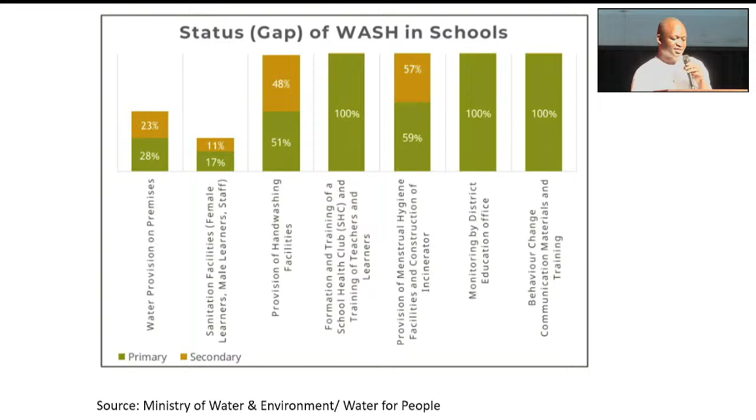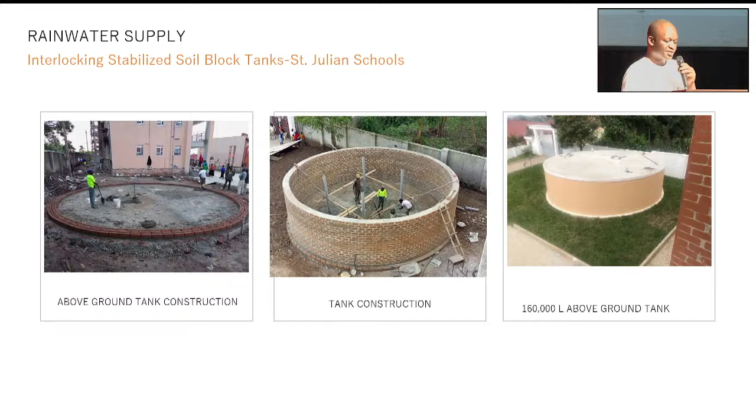We'll look at aspects of water supply and treatment, starting with rainwater supply. My colleague Alan will get into more detail on this, but one of the technologies we're using in terms of storage are tanks made out of interlocking stabilized soil blocks.

Here we are doing a double wall. This is an above ground tank, with a capacity of 160,000 liters. We have done tanks underground with a capacity of up to 450,000 liters using the same technique.

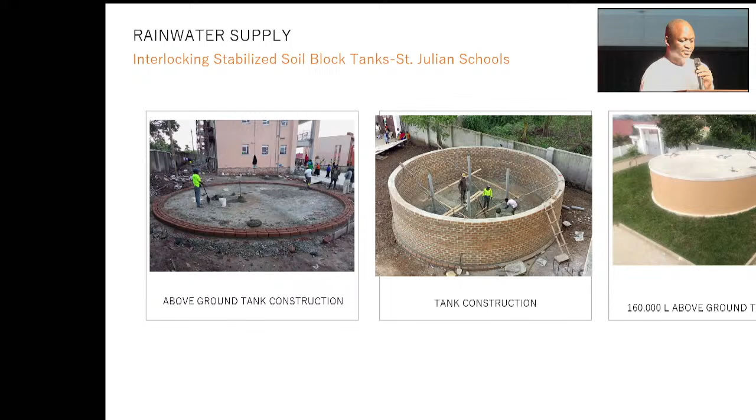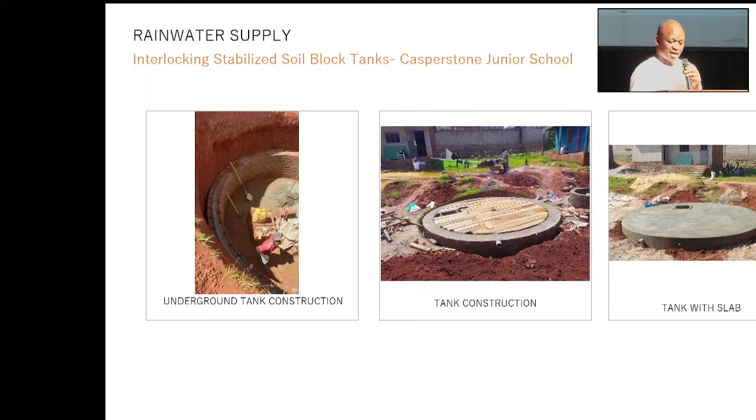This is an underground tank water supply at a school on Entebbe Road called Casperstone Junior School. It's underground, and the school is a small school for around 100 people, so this was a 40,000 liter tank. As you can see, it has a slab.

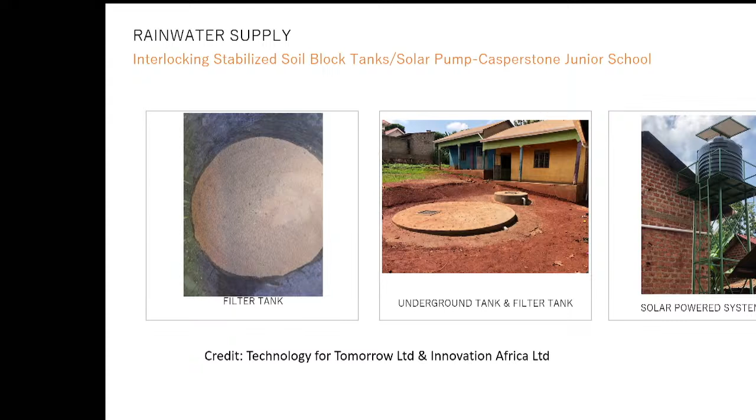The other element it has is a small filter tank that works on the principle of the biosand filter. So there's some aggregate, some sand, and larger aggregate, so it filters through—that's what you're seeing in the middle picture, the smaller tank. Then we are able to supply the school water to the elevation tank, which distributes to the school, including a membrane filter so that we can actually access clean drinking water.

These are also other options for groundwater supply. I think one of the headaches for institutions, particularly health facilities and schools, is even when they do have pipe water supply, they cannot afford it. For those in Uganda, it's almost a proverb to hear of a health facility whose bills have run so high.

So these alternative sources—I know a lot of private schools in the country use alternative sources, including groundwater. This one is for groundwater, which is pumped to an elevation tank, and you have a tap stand there, and they're also able to have a pour flush latrine to ensure hygienic sanitation.

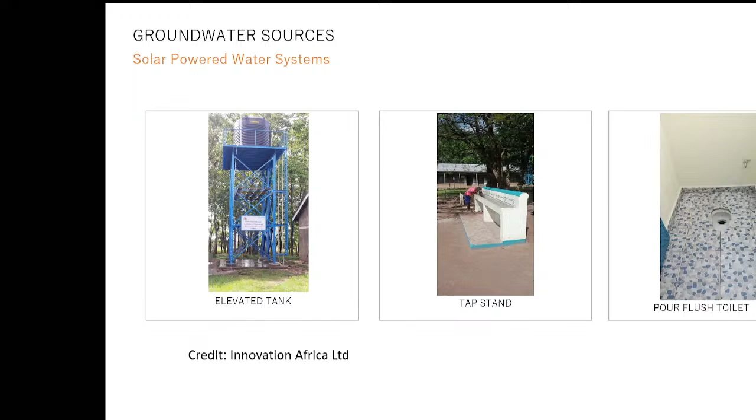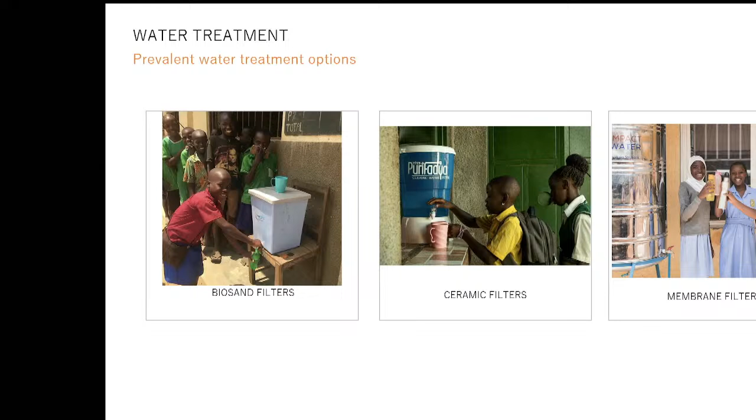There are a number of options for water treatment: point of use, like the biosand filters and the ceramic filters, but also you have the membrane filters that can be connected to the pipe system and provide drinking water as an alternative to boiling.

There's the pedal tap as well, the normal hand wash basin. And there's also a Washalot, which has been promoted in many schools in Kampala, particularly by GIZ and Water for People. That encourages washing because many students can access it, and it also helps in the aspect of behavior change around hand washing.

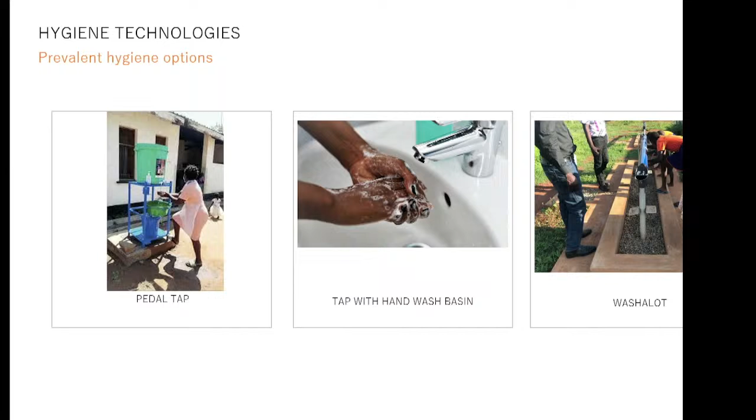This is maybe an exemplar of a drainable school latrine. This was done by USAID, under the Uganda Sanitation for Health Activity. It's a drainable pit latrine.

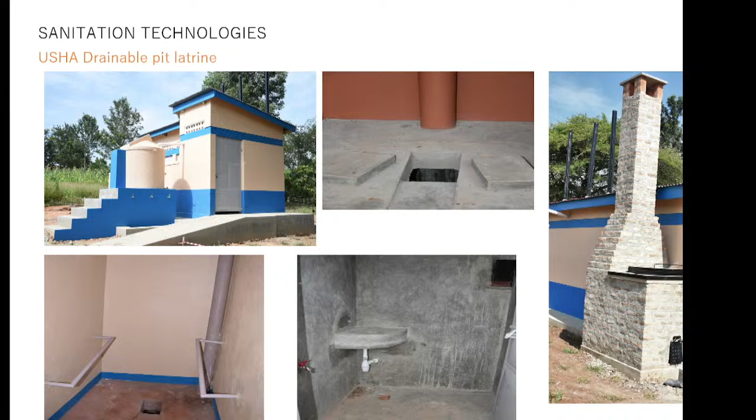As you can see, one of the features they added, on the top left, is a tank with 3 taps getting water off the roof for hand washing. In the middle, there's provision for menstrual hygiene, a place where girls can clean up. There's also provision for an incinerator on the right, which helps with managing menstrual hygiene waste, especially single-use pads, because frequently they get thrown into the latrine, creating a problem when trying to empty these drainable pits.

This is another one promoted by GIZ. It's a pour flush latrine, and in one of the rooms you see a bucket for menstrual waste. It's a pour flush system, and in many cases these are also connected to the sewers where available. At the bottom left, we see a urinal for girls, and on the bottom right, a urinal for boys, with hand washing facilities above.

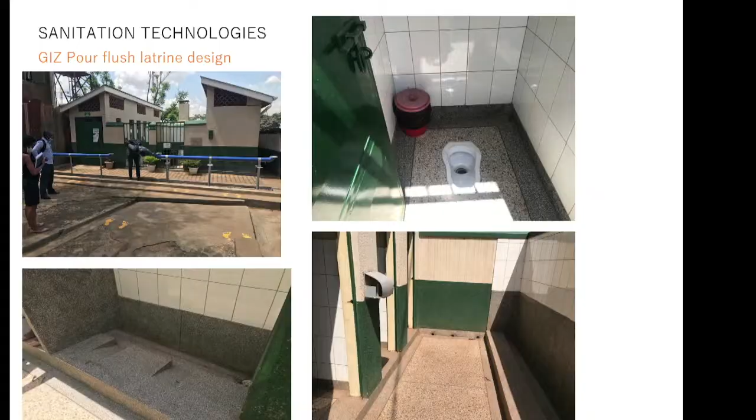In terms of clean energy, one of the technologies that saves maybe 50 to 60% in terms of wood fuel is the rocket stove, and there are mobile ones which can be moved afterwards, typically made of stainless steel. Then there are also fixed ones, and this is all really around managing the efficiency of cooking and reducing the carbon footprint.

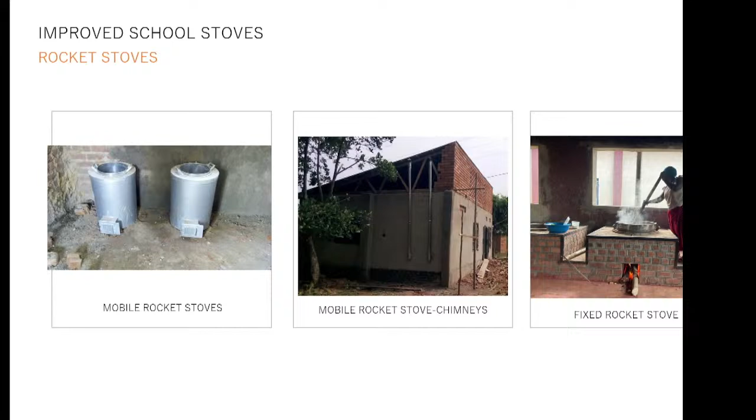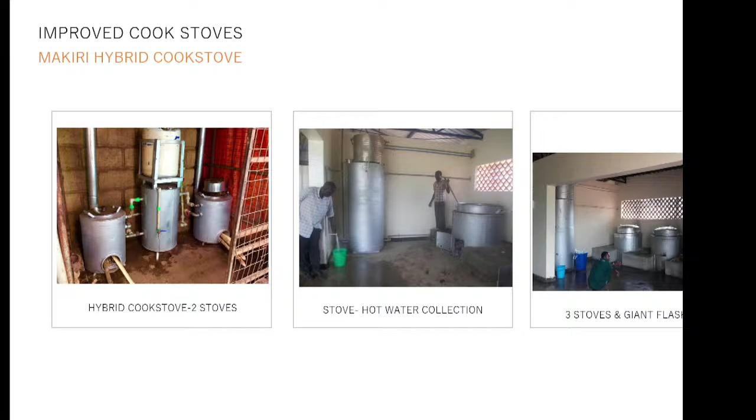Then there's an improved hybrid cook stove. The idea, if you look on the left, is you have two stoves, and in the center, at the bottom, is really a giant flask. So this is a hybrid cook stove. As you cook the food, you also heat a water jacket, so instead of maybe a clay jacket around the stove, you have a water jacket. If you look at the middle picture, there's a tap, and in that tap there is hot water. So instead of starting to cook at maybe 20 degrees room temperature, you're able to start at about 80 degrees each cooking cycle, because you already have stored hot water. That's also similar with the 3 stoves on the right.

In terms of waste management, I think a big concern for many schools is around menstrual hygiene management. The 2 pictures on the left and middle show a design of an incinerator made from stainless steel, with provision for a chute through which pads can be disposed, making users less likely to throw them into the toilet or a pit through the drop-hole.

Then for storey structures, here we see on the right a big kind of pipe going down that also provides for the pads to fall down right up to the bin, which can then be collected and taken to a point where it's managed.

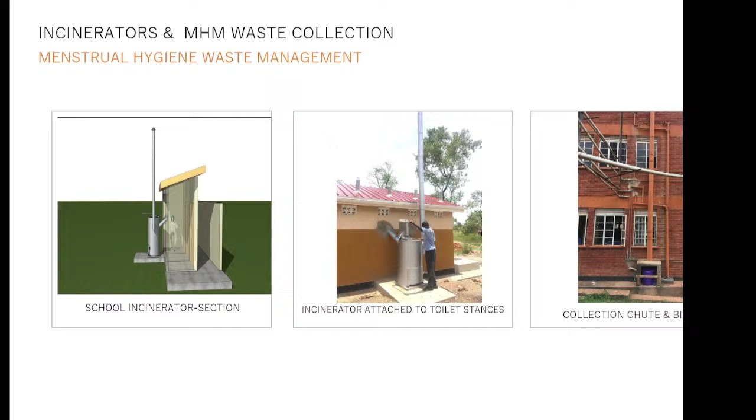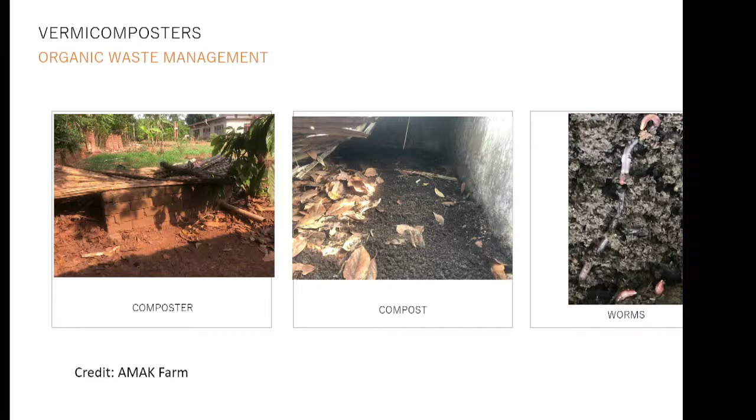Then in terms of organic waste, there's vermicomposting, where worms can be used to break down the waste and form a compost. In those pictures we have a rectangular shaped composter just covered with a papyrus mat, with the compost in the middle, and the worms on the right.

Then another one around plastic, that's a very big concern. There's a company called Ecoplastile that's doing some work around this, creating roofing tiles from plastic with sand, so we call it a polymer.

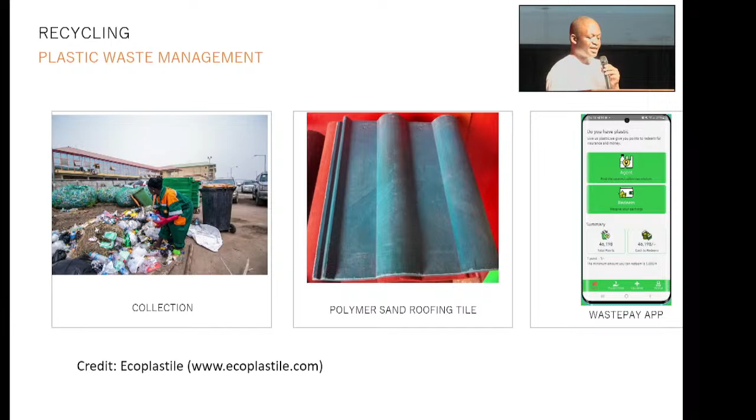insurance or even airtime.